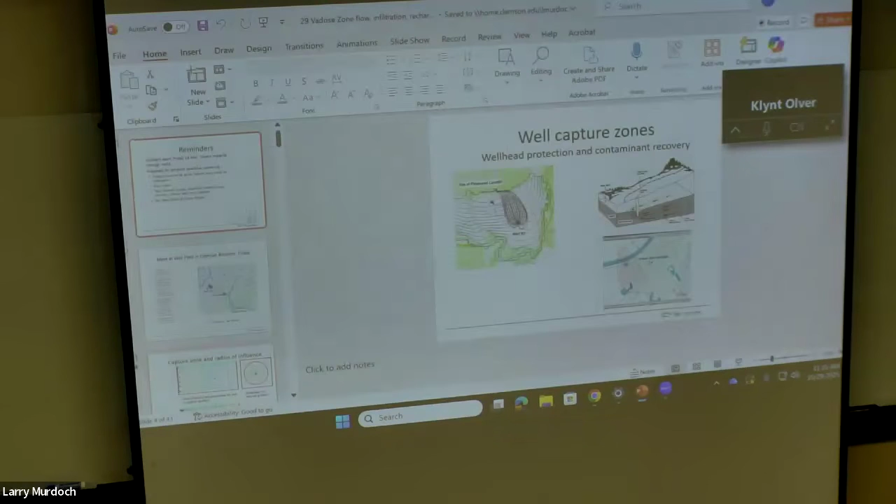Reminder, the midterm is coming up. It still will be a while yet, two weeks from Friday, and it will be up through last class. It won't include this class. We're starting a new topic today, and I won't include that. So it's still a couple of weeks out because we want to do this homework cycle.

There'll be a homework cycle on this work that we're going to do on Friday. There'll be a slug test, and that topic will be on the exam. So I want to go and do that homework and get it back to you before we have the exam, right? It'll be up through last class, so you can see on the syllabus there's a double line on the topic.

There's a project required for grad students, and it's going to be extra credit for undergrads. It'll start soon. The way it's going to be done is there'll be a start-off with a proposal. And that's coming up, I'm not quite sure when the deadline is.

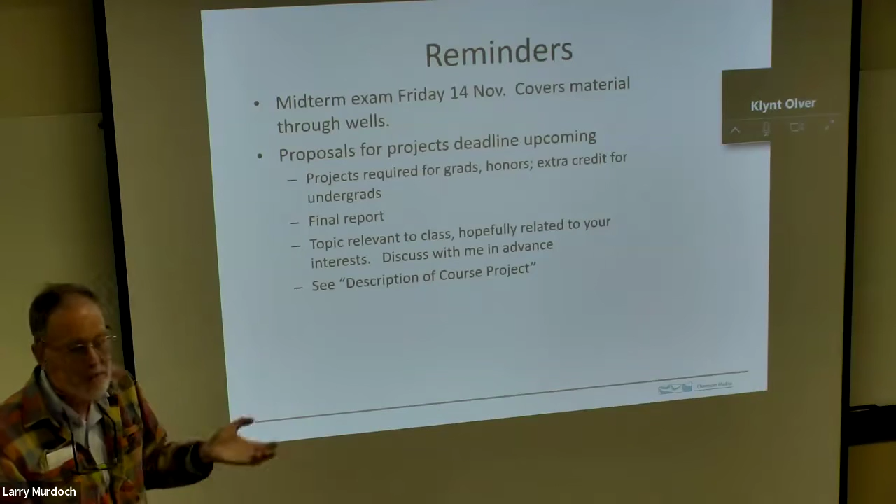It's on Canvas. If we're going to do a project, what I would recommend is that you talk to me about it first. So grad students, you should do that. What I want is to have you do a project that is doable in the time frame, but also relevant. So it should be something related to the things we're doing in class.

So primarily related to groundwater. A lot of times people do things with some of the models that we've been working on. A nice topic is to take the models we've been working on one step further than what we've been doing in class. So there are a variety of things you can do along those lines.

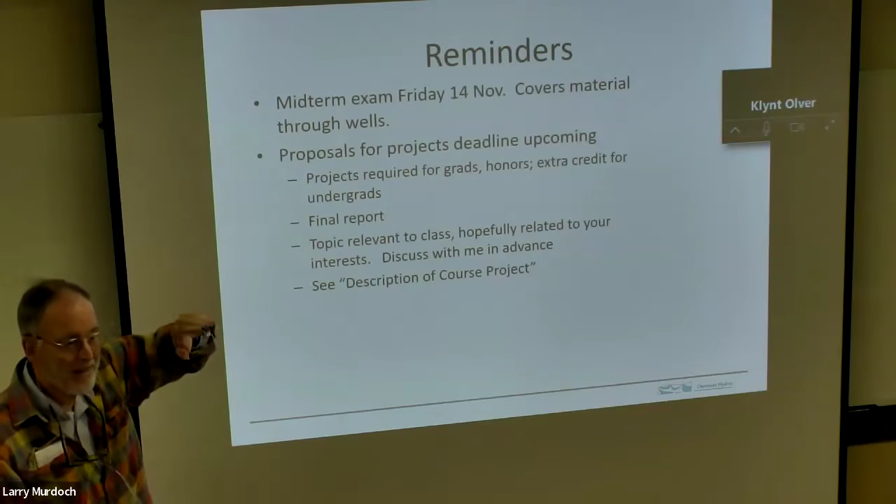It'll be extra credit for undergrad, and I just realized this is coming up, so I've been in touch with the people at Canvas to figure out how to put it into Canvas so it's kind of formally in there, so you can see how many points it's worth. It's a little tricky because everybody's lumped together, and some of you are required to do it, and some of you are optionally going to do it. So how to get Canvas to recognize that, I'm not quite sure, but I'll figure it out.

Okay, so that's coming up. And coming up next time is this field class where we're going to be down here at the well field. We'll meet there. It'll be the regular class time. So keep that in mind when you're planning your schedule.

The way it's going to work is I'll tell you about slug tests and show you how to do one. I'll show you the equipment. We'll have to measure the water level, depth to water. Remember, you've had to use that in calculations, the depth of water. I'll show you how to make that measurement. And then for the assignment, you'll need to come back and do the slug test yourself.

Okay, so it'll give you the opportunity to go and use this gear and make measurements yourself. And the way it's going to work is we'll break up into groups, and I've assigned these groups here just to make it simple. So what we want to do is identify a time when each one of these groups can come and do the test. It'll probably take an hour or so.

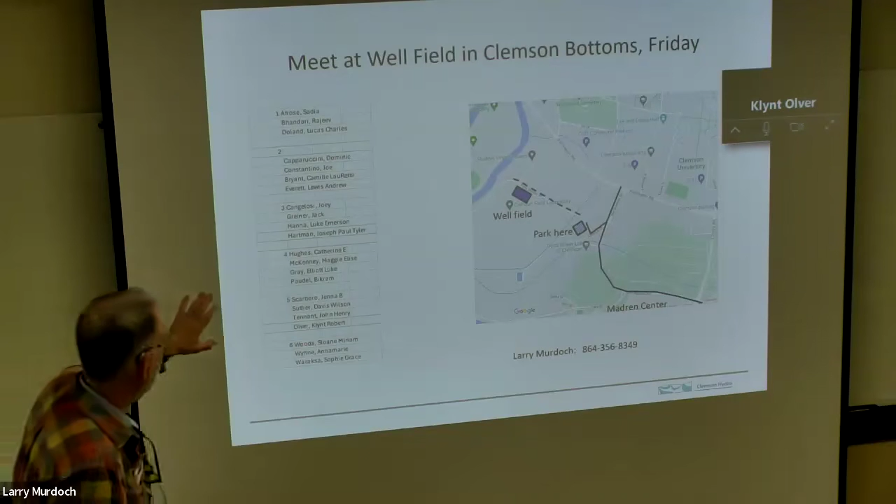One thing that would be good, maybe after class, go and say hello to the group members. Some of you may know other people in the group, but it would be good to introduce yourself. Try to figure out a time when you can all be there to do it. Maybe when we meet in the field, we can do some scheduling to make sure there's no overlap. So try to find maybe two times when the whole group can make it, and then we'll get a unique time for each group to come.

This has gotten pushed back a little bit, so the homework for this is due a week from Friday. Normally we would have done this on Monday, and you would have had this week and next week to do the field work and then work it up. Now we're going to be short some time, so I'd like to keep it still due Friday so I can grade it and get it back. If things get pushed with your schedule, then I'll push the due date back a little bit. But because I want to get the homework back before the exam, I'd rather not push the exam back. So we'll play that by ear, but right now we'll be targeting getting the homework done by a week from Friday. Any questions on that?

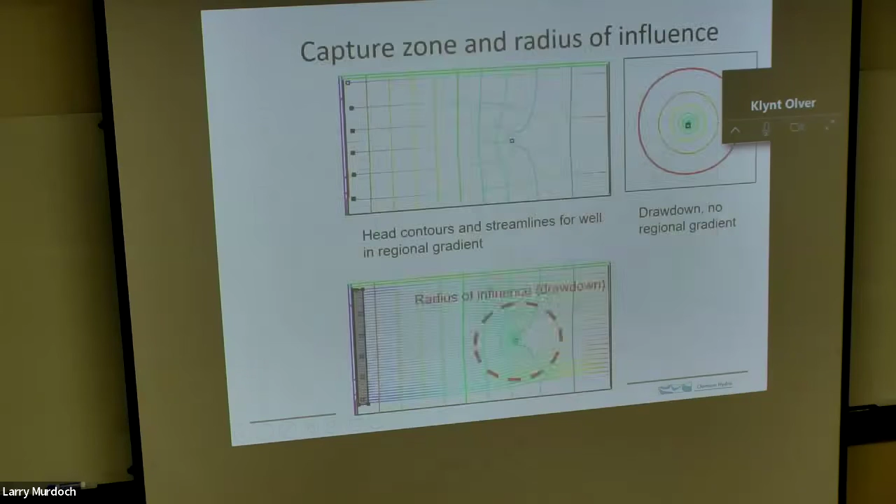So we're going to change gears a little bit. What we've done so far in the class is we started out with some big picture stuff. We learned about flow through porous media under saturated conditions, learned about the water table and contouring the water table and flow nets and how to analyze flow in saturated conditions. And then we spent a bit of time working with wells and how to characterize aquifers.

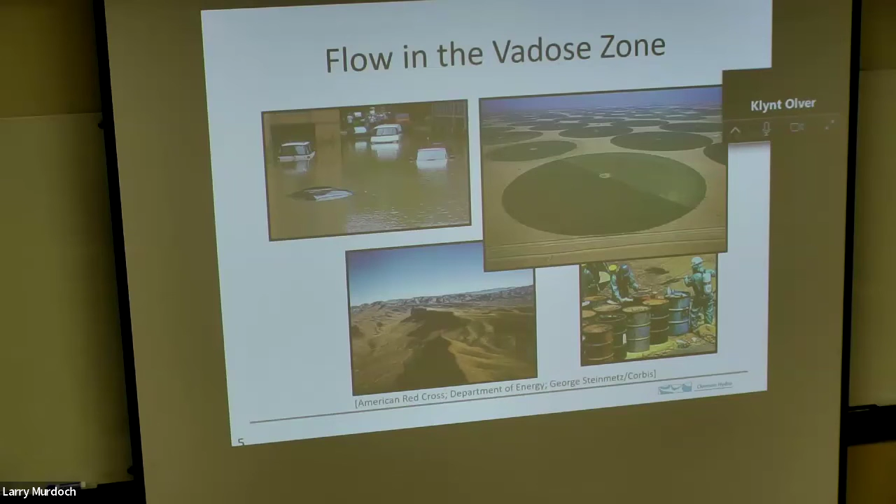So what I want to do now is go from the aquifer up above the aquifer and look at what's happening in the vadose zone. We're still in the subsurface, but we're going to be above the aquifer, looking at how to think about flow and storage of water in the vadose zone. There are a bunch of reasons why we might be interested in this.

When we have rainfall - oh, and by the way, the weather looks like it's going to be good on Friday. It'll be sunny, partially sunny tomorrow and then sunny on Friday, with a high in the 60s, but it might be cooler in the morning. So check the weather, maybe bring a jacket. Also it's in this grassy place, and the grass is a little bit high in places, so it may still be wet. I'm going to bring some waterproof shoes - may not need them, it may be dried out, but just a heads up about that.

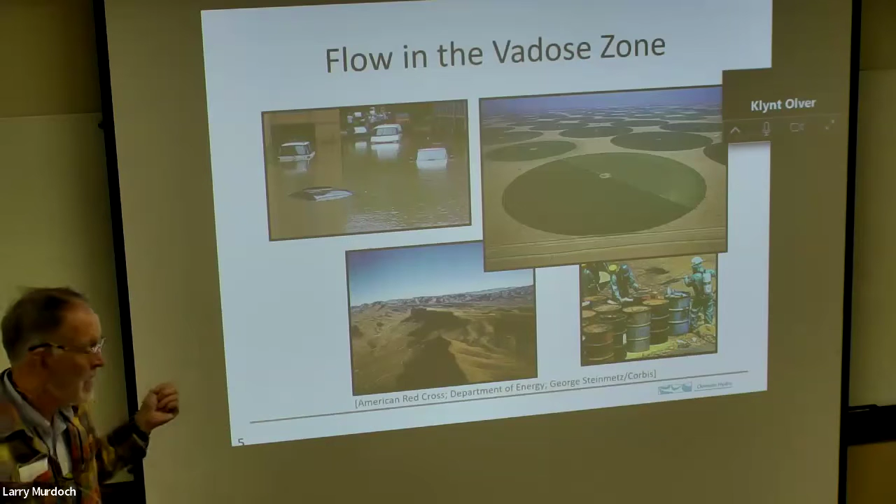So yesterday we had a pretty good amount of rain, right? And so what happens when it rains?

What happens when it rains is the rain falls, and some of the water that falls as rain infiltrates into the subsurface, and some of it flows downhill. The partitioning of the rainfall between infiltration and either overland flow or interflow plays an important role in flooding, because the rapid rise of water comes from this component of the hydrologic cycle. If rain is partitioned into infiltration, it goes into the subsurface and makes its way to the stream slowly, giving you base flow and modest changes in water level. But this other component is much more rapid, and that leads to flooding.

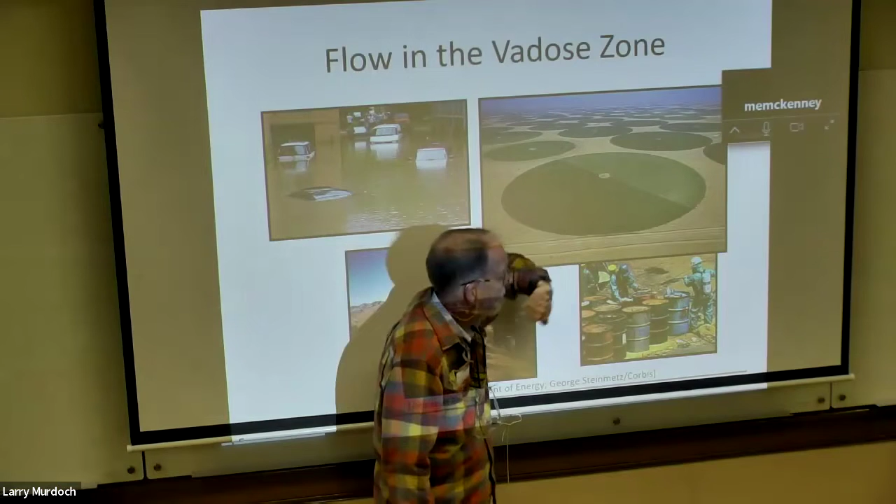So if we're interested in surface water, we'll also be interested in the role that flow in the vadose zone plays in creating floods. Most agriculture is grown in the vadose zone, so the flow of water there is going to be really key to having successful crops.

You want the water to be stored long enough for the crops to utilize it over some time period. You don't want the water to go through the soil very rapidly with very little storage, because then the crops don't have a reservoir to draw on. You also don't want it too permeable—if you had very clean sand, crops don't grow well on that because the water goes through it very quickly.

On the other hand, if permeability is really low, the water stays there and remains saturated for a long time, and you don't get oxygen into the roots. So those two end members are poor for growing crops. You want a grain size distribution in the middle—a loam is the ideal case, a broader distribution of particle sizes that holds water but also allows air to get in and oxygenate the roots. So the details of flow in the vadose zone are really key to agriculture.

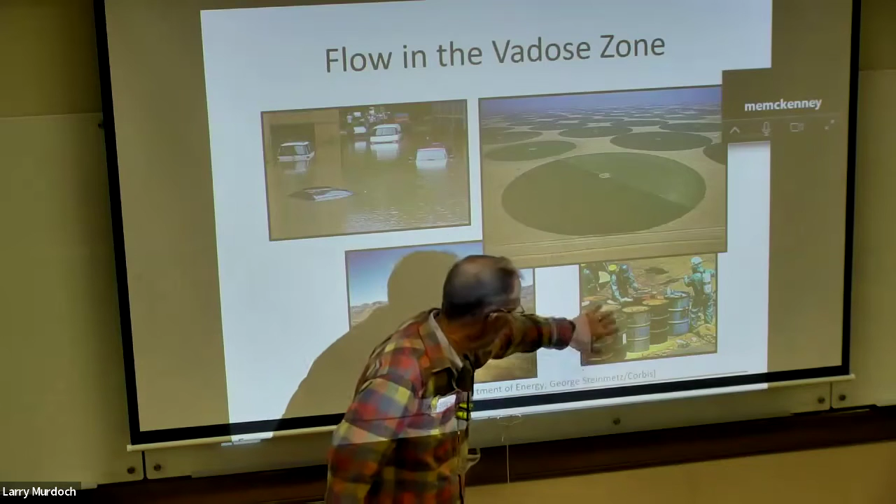This is kind of a classic place where they were storing these old drums full of nasty stuff.

So then there's this place. Anybody recognize that place? No?

Anybody heard of Yucca Mountain? It used to be a lot better known than it is now, because for a long time Yucca Mountain was the high-level nuclear waste repository that we as a country were going to use for our nuclear waste. They spent a lot of effort understanding the site, and then the political winds changed, and they decided they would not put it there and would do something else. It's not clear just what that else will be—I think they're still working on that. There's been some discussion lately that maybe they would consider going back to that site.

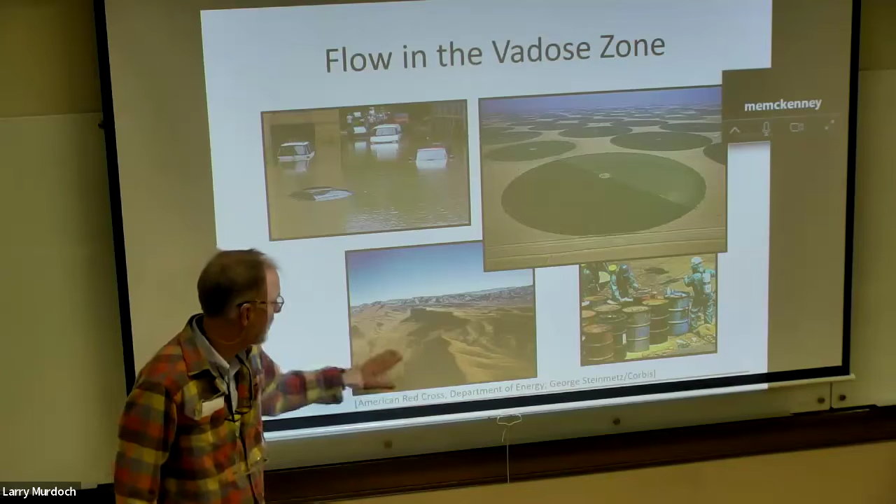What this is, there's this ridge, and you can tell it looks pretty dry. I don't see anything growing. This is in Nevada, in a very arid place. And this is a ridge, and the water table is very deep, several hundreds of feet below ground.

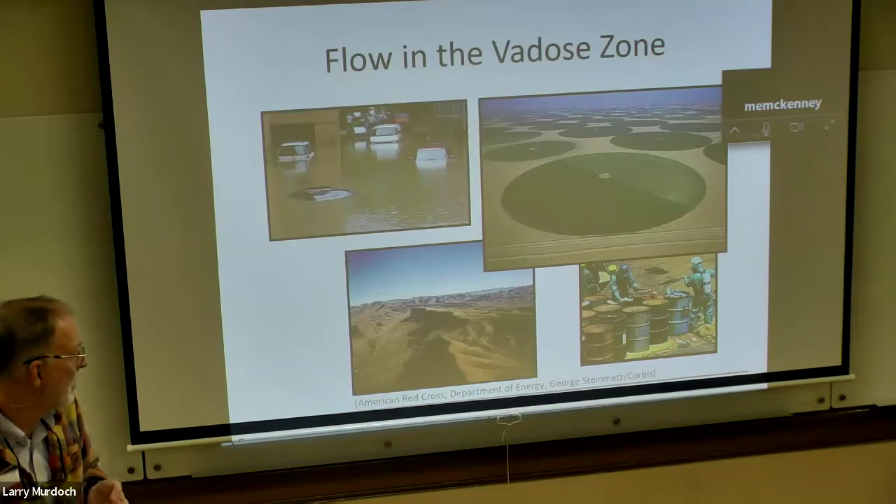The idea was that they would take the high level nuclear waste and put it down below this ridge, about halfway down from the ground surface to the water table. So it would be deep, but still way above the water table. It's very arid, so they'd expect very little water to encounter the nuclear waste, and even if there was some kind of release, it would still be a long way to go to reach the water table. So the properties of flow through the vadose zone were factored highly into the selection of this site as a good candidate for storing nuclear waste.

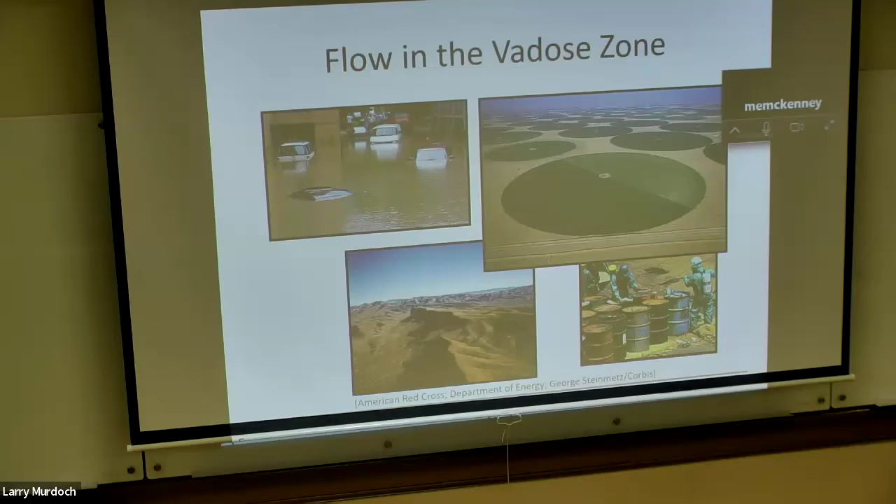Okay, so here's what I want to do: talk about the conceptual model of infiltration and flow in the vadose zone. How do we characterize the vadose flow properties, and then how are we going to go about simulating it?

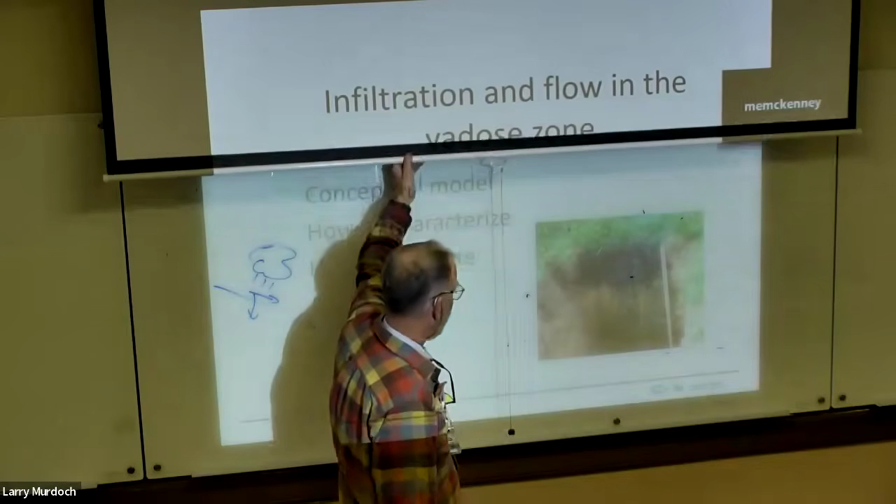What I've got here is a pit that was dug at the site of an experiment where a ring was pounded into the soil, right here. Let's draw it out. So there was a ring driven in like that, sticking up like this, and here's the soil. Then they put in some water, and the water has some blue dye in it.

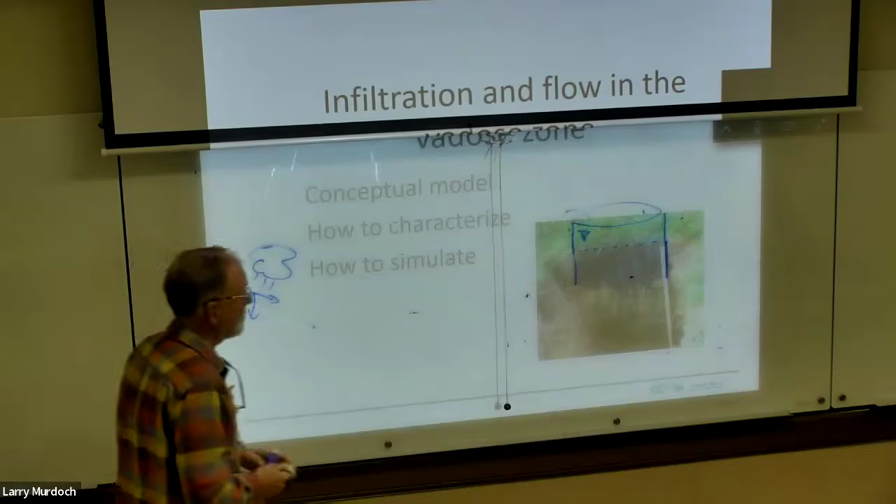So we look at it in cross section over here. Here's the ground surface, and here's this ring. Some water was put in here, ponded up at the ground surface, and it's infiltrating. The water level is usually kept the same, and the water infiltrates. After a certain time, the water is infiltrating down to that point, and it's saturated there, then saturated in the subsurface, and you have this zone that ends up dyed.

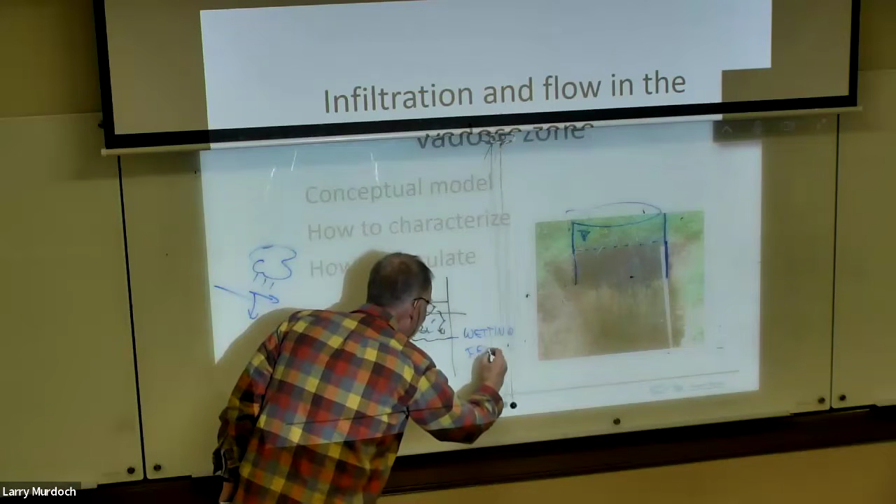This leading edge is called the wetting front. You can see here at the end of the experiment, the wetting front is right around here. There's the wetting front, and it's gone down about a foot, I guess.

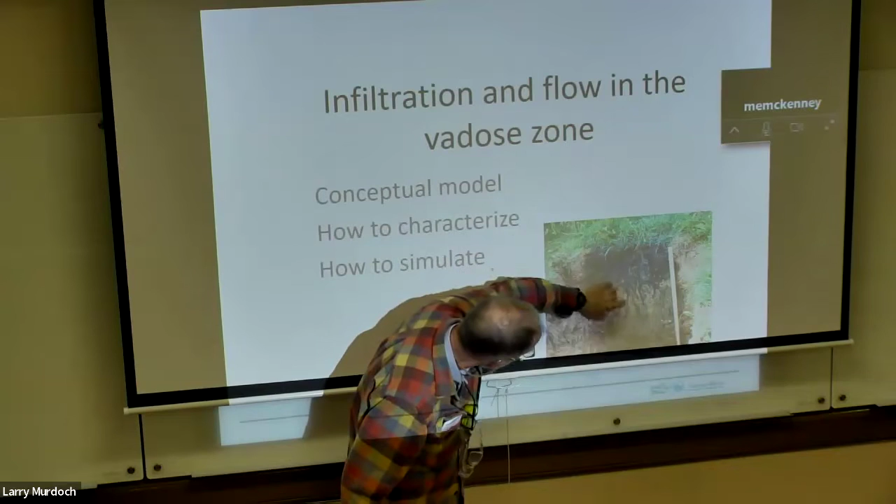That's the main thing that's happening. What you can also see is that these are dyed columns that go down. This one goes pretty solid down to about here, and then maybe there's some blue dye there. So these are preferential flow paths that the water is following, probably cracks, or channels formed by roots that have penetrated deeper. You can see some of the water is flowing more rapidly than just the wetting front.

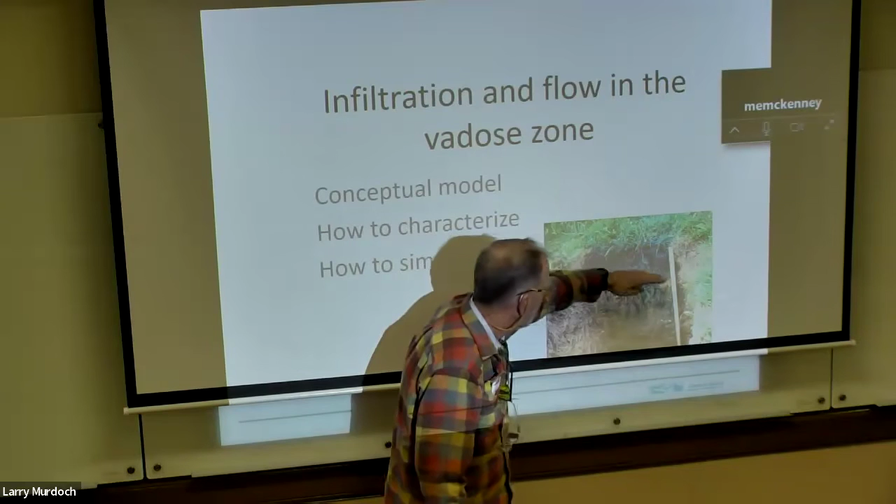Some of it is moving maybe twice as deep as this, but it's a much lower mass going through these preferential paths. So if you're concerned about where the zone of saturation is and the main mass of water infiltrated, that's going to be defined by this wetting front. But we also have preferential paths where some water is moving much more quickly. So if you're concerned with contaminant migration and how rapidly contaminants might reach the water table, there are really two rates of advance: the rate at which the wetting front is moving, with a large mass, but if you're concerned about when some contaminants arrive, the preferential flow paths are conduits where contaminants could move much more quickly than in the wetting front.

Okay. Yeah, does this help with your conceptual model? You can't get any actual data from this kind of experiment, or can you? All I see is preferential flow paths, like you said, but I don't know how you would measure, or pull actual data from that.

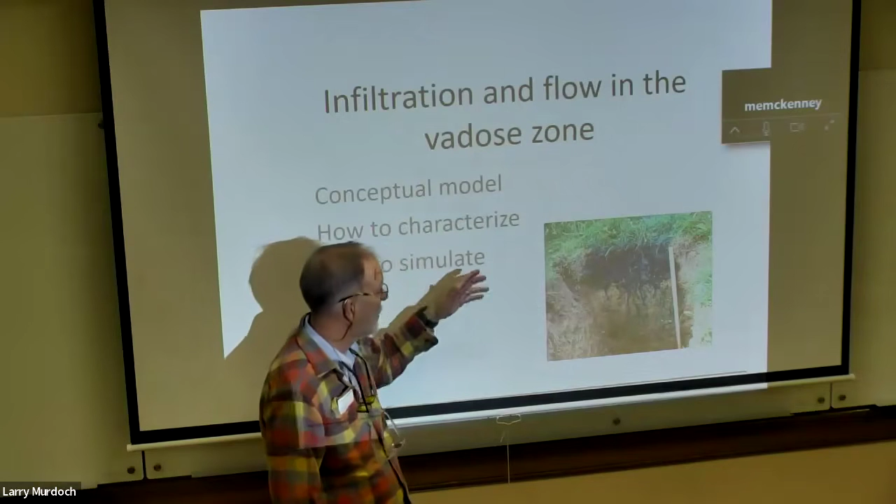Yeah, so one of the things that's done with experiments like this is to get just the bulk infiltration rate, and see how that changes with time. You're not really concerned about this per se. But if you're interested in contaminant transport, then you'd be interested in this, and you'd want to see what the spacing is and how far the dye is making it out in front of the wetting front, things like that. But it would be difficult things to measure without excavating it.

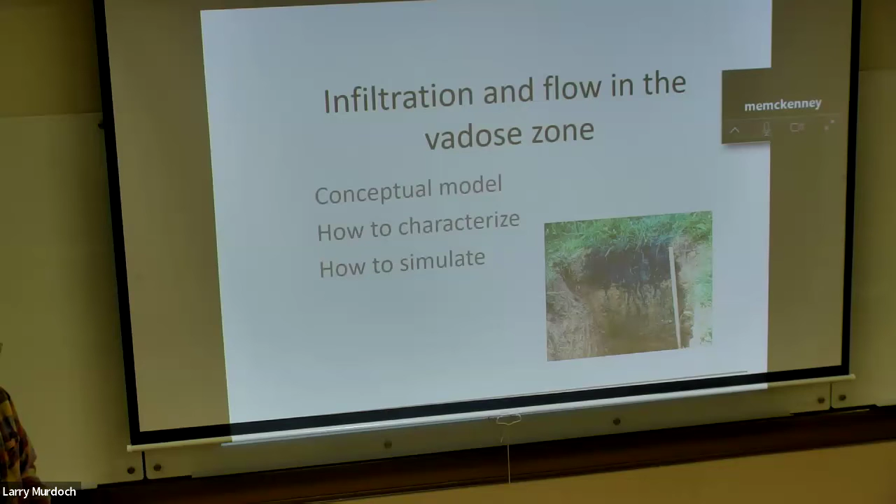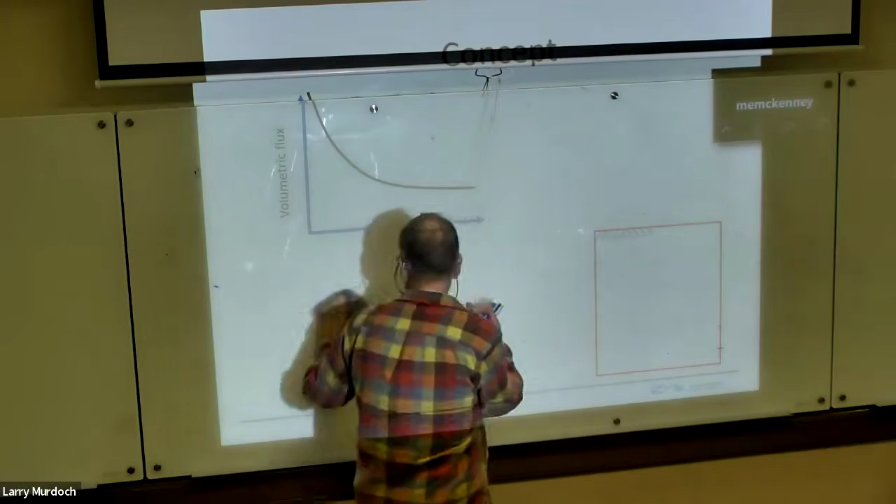Okay, so we'll take a look at some conceptual models here. The plot here is volumetric flux as a function of time. I want to introduce the concept of infiltration capacity. This will be the flux in. Here's a cross section: there's the ground surface, and this curve here is what we'll call the infiltration capacity.

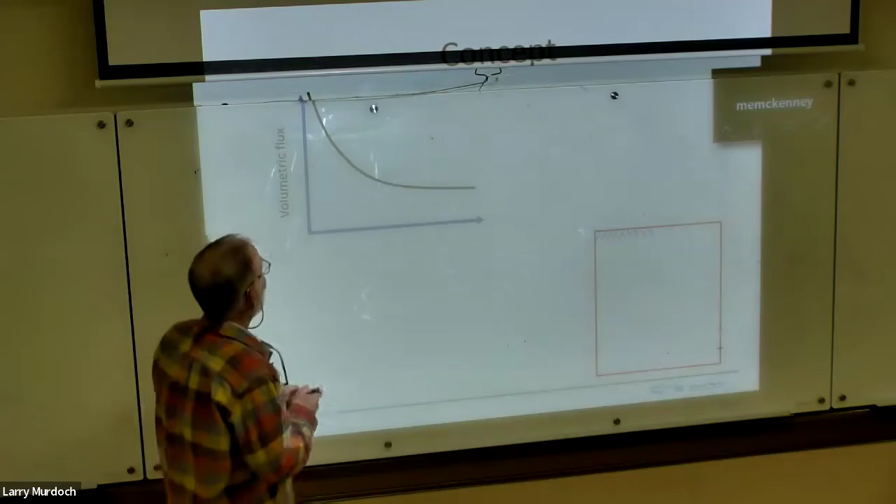Infiltration capacity is the maximum rate that the water could infiltrate. We start out with the soil in a dry state, since it's been a long time since it rained, so the capacity to infiltrate is pretty high when we start.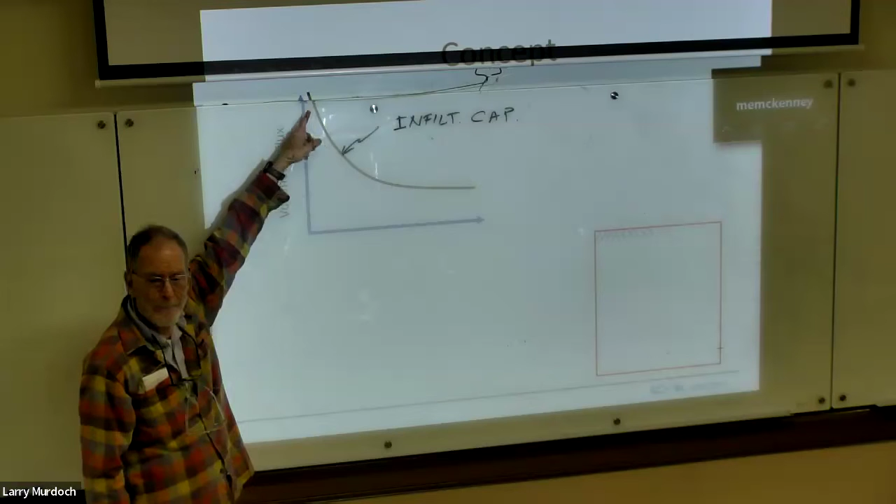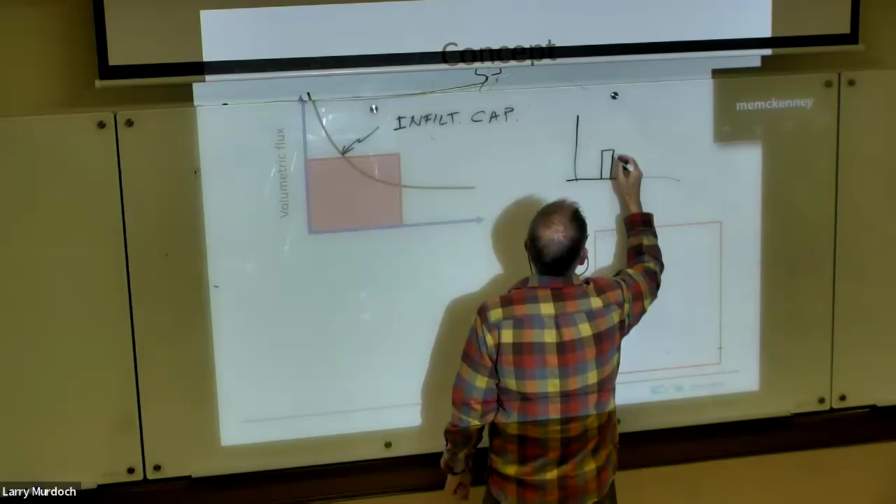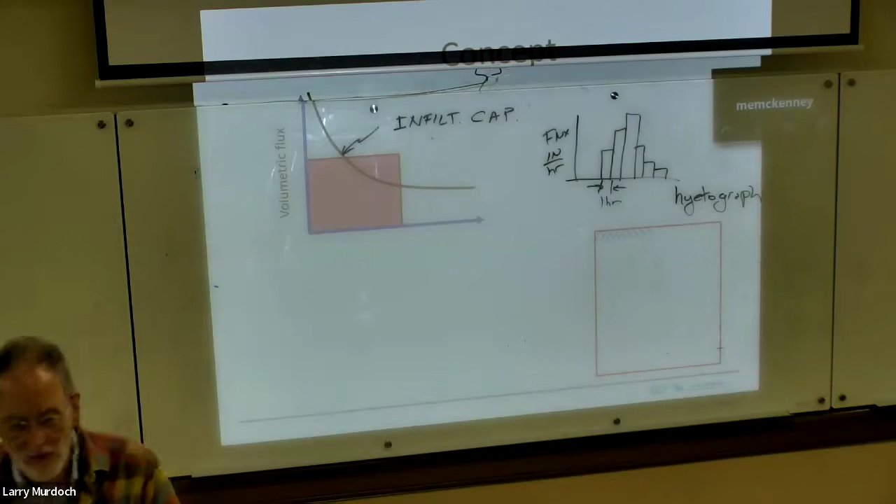Now, since it's just a conceptual model, we'll keep things simple and plot the rainfall. Rainfall is often represented using a histogram approach, like the rainfall we had yesterday. This is called a hyetograph, and it's a flux averaged over, say, one hour, so it would be inches per hour as a flux. The rainfall rate is changing with time, so to characterize the flux you average it over a certain time period, starting out slow and then building up, changing with time.

So this is what a real rainfall would look like. What I'm going to do is take a simplified approach and average it. We could take just one of these blocks, or average it over the whole time period, so instead of varying with time, it's just one block, one average rate over the whole time. So this is a rainfall rate at this rate over this whole time -- very simplified rainfall.

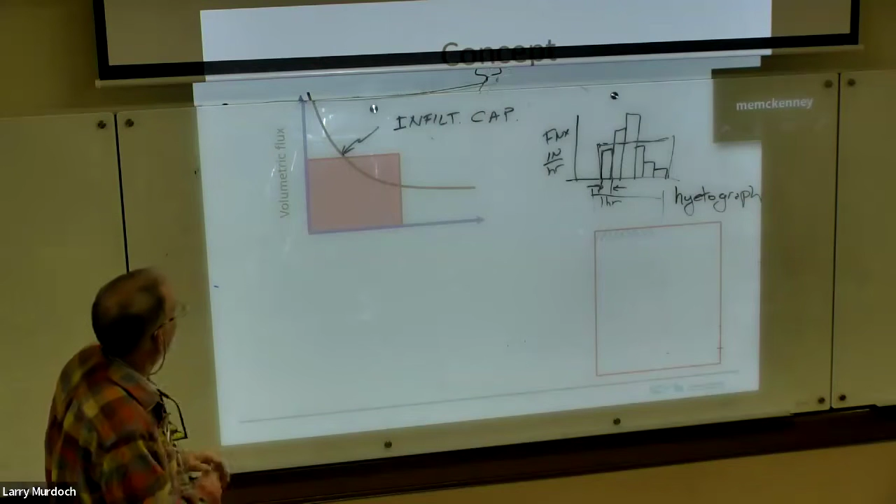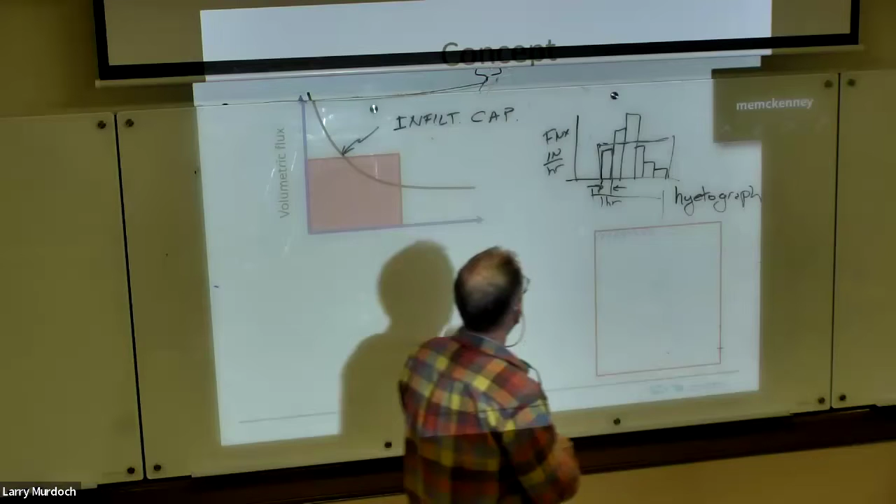So what happens when the rain starts out is the infiltration capacity is greater than the rainfall rate. So as the rain falls on the surface, it's all going to infiltrate right here in that time period.

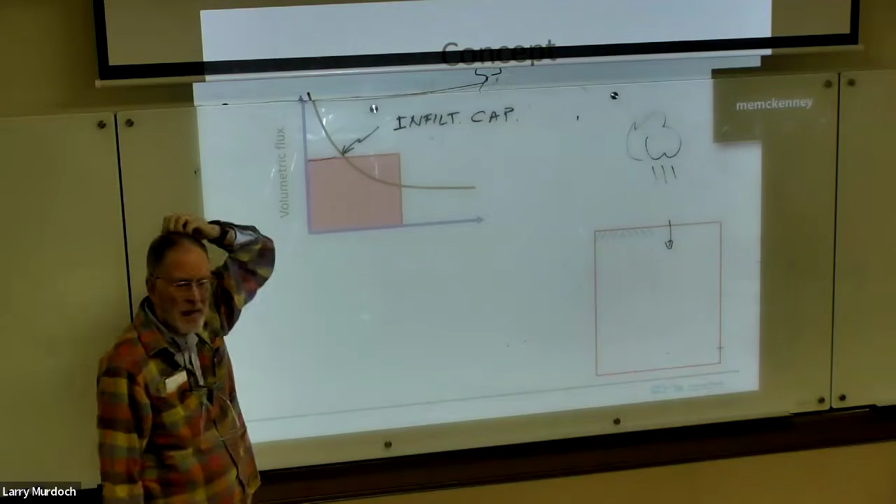So if you're out in a field and it starts raining, you look down and you're not really seeing any water because everything that falls is infiltrating. But as that happens, the water content of the soil is increasing, and as it increases, the capacity for infiltration is going to decrease. So this change in infiltration capacity is occurring because the soil is getting wetter as it rains.

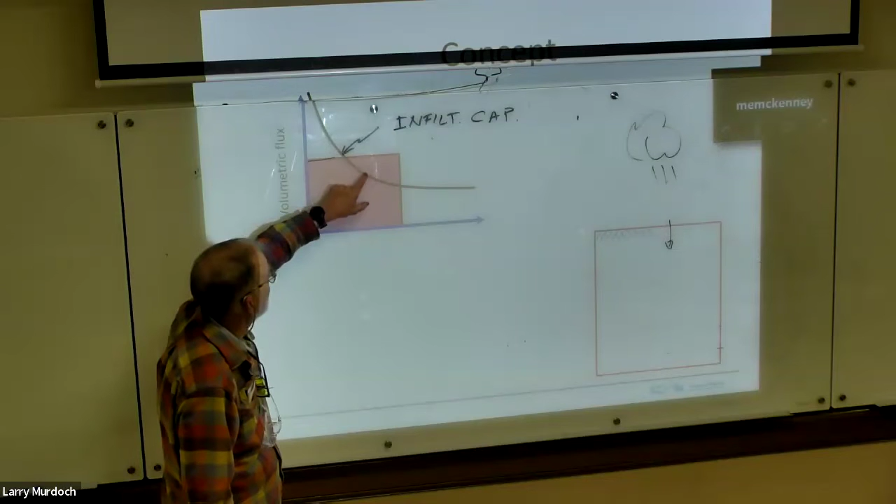And then at some point, the infiltration capacity becomes equal to the rainfall rate. When it surpasses that, the capacity for infiltration becomes less than the rainfall rate. So if we think of it as a control volume, if the flow into the control volume is greater than the flow out, which is the infiltration capacity, then we have to have some water stored in here.

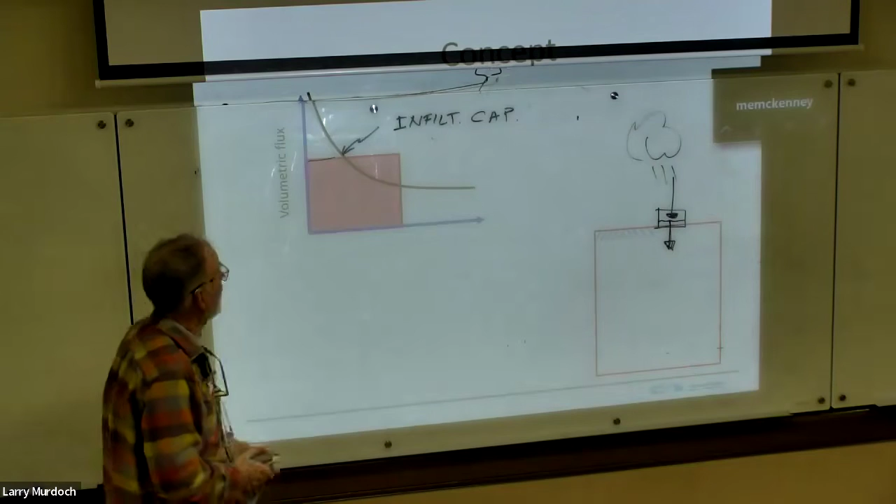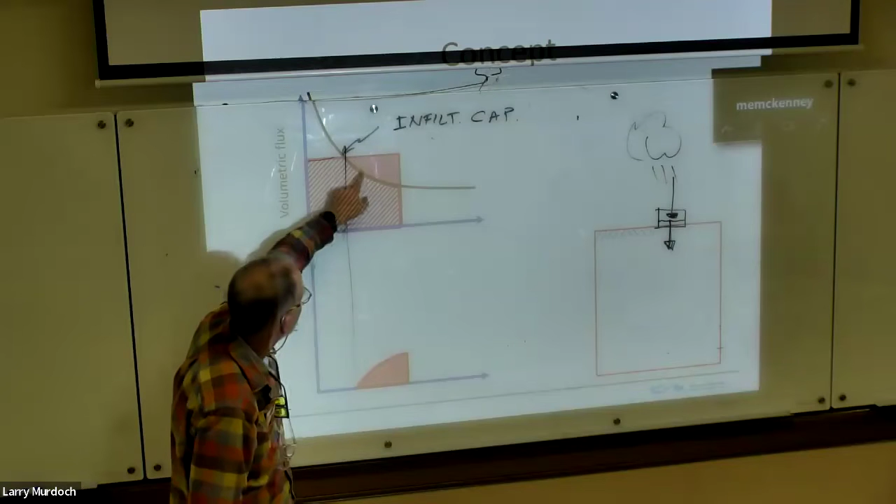So what happens when we've reached this point is we start to get water ponding at the surface, and potentially overland flow. This is the rapid flow that would go downslope and accumulate in streams. The hatched part is what's going into the subsurface, and this little piece is going as overland flow.

So then we continue on. Here's the graphic: there's the rain, and we've got some infiltration coming in, shown in the graphic on the right. There's the wetting front moving down, and as this is happening, this is the depth that the water has reached, and the water content here is increasing.

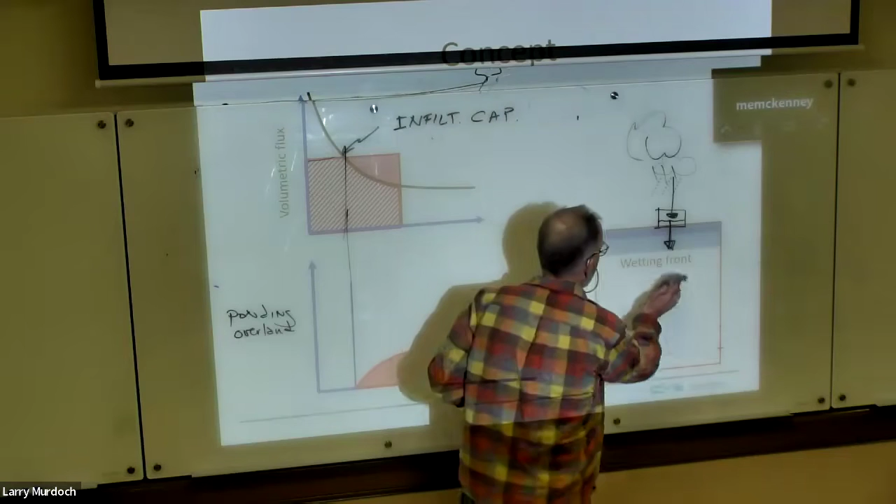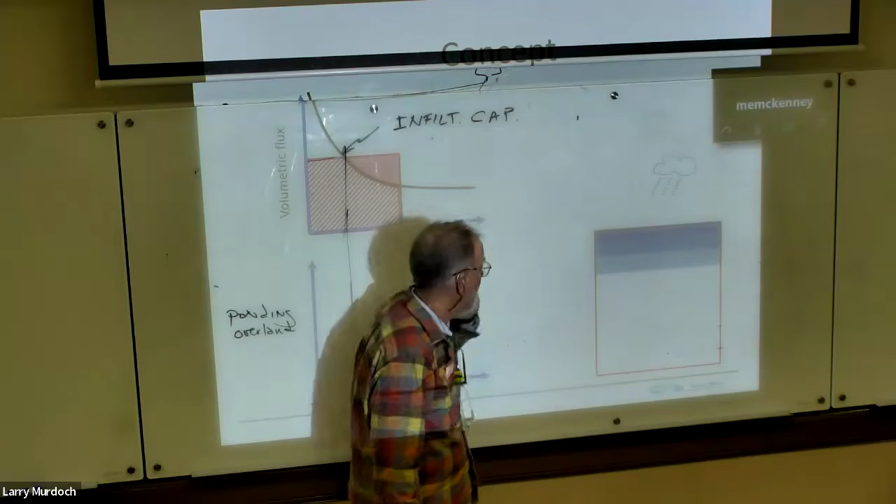And it keeps going, keeps increasing. And then when it gets high enough so that the water content here at the ground surface is saturated, the soil here is saturated, then we start to have ponding here. So the rainfall rate is greater than the rate at which the soil can infiltrate, and you get ponding building up there. And if you're out walking around and the ground is flat, you start to see puddles forming, right? That's a common thing to see.

I didn't really think about it at first, but in order to have the ponding, or puddles, you have to have a rainfall rate that is greater than the infiltration rate. Now, it's going to form ponds if the ground is flat, or you've got some closed basins that form a puddle. But if it's a slope, then you have overland flow.

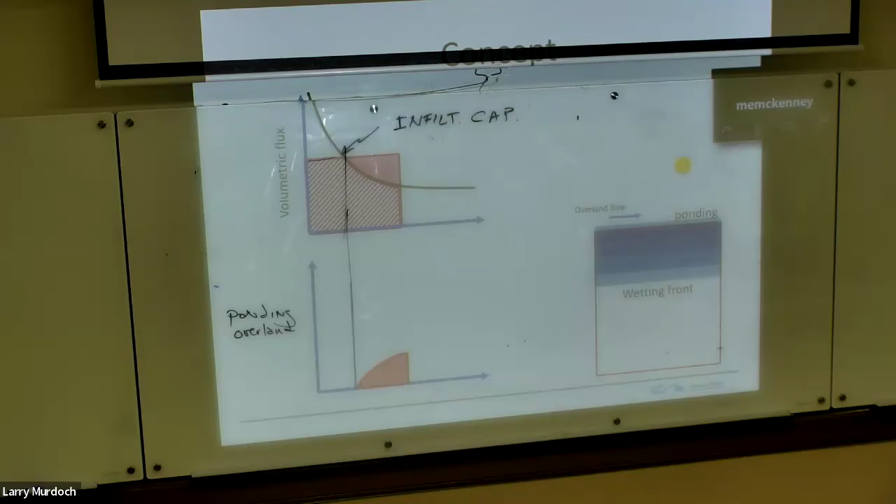So then the rain stops, and in our simple model here, the rain is stopping, and overland flow is stopping abruptly. It's a simple model. But then what's happening over here is this is stopping, but this process is continuing.

So what will happen after the rainfall is the wetting front will continue to advance, and it's going to do that by moving down. At this moment, there's no water here, no infiltrating water here. This is partially saturated. When the wetting front moves down to here, then there's only this much water in there.

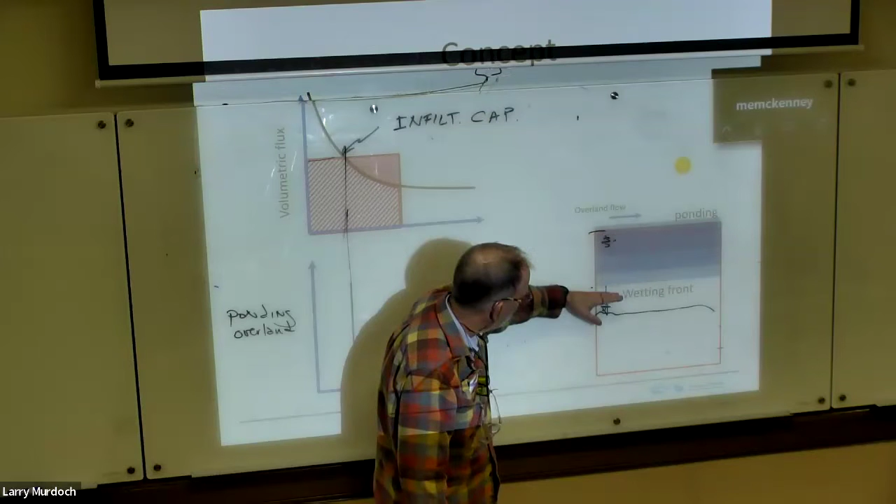So if the wetting front moves down here, then that means that some of the water that's here has to drain out of the pores. As the wetting front advances, the pores drain here, and the advance of the wetting front by gravity is slowing.

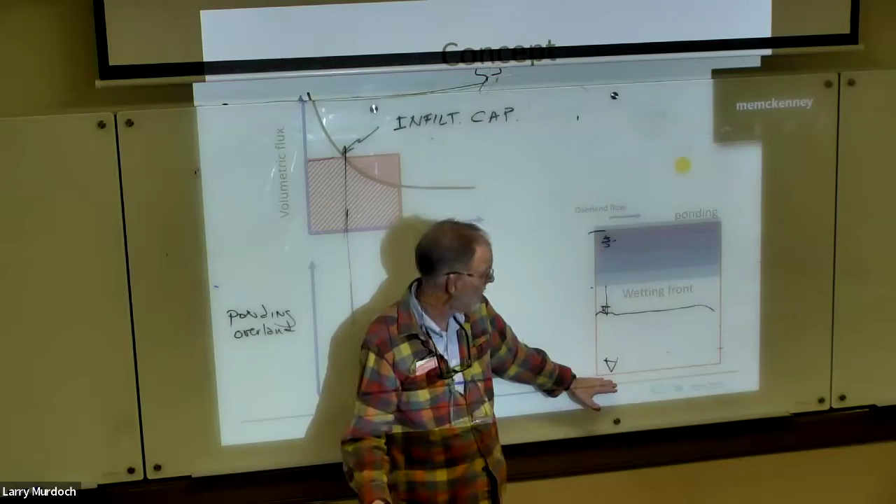And eventually it may stop or it may reach the water table, down here. If it makes it down to the water table, then that's recharge of the aquifer. If it doesn't make it down, then we don't have any recharge.

What's going to happen also is as it's moving down, it's slowing down. And then we also have trees here with roots, and the trees are starting to bring it back out. That will also slow it down and limit the depth that it can reach.

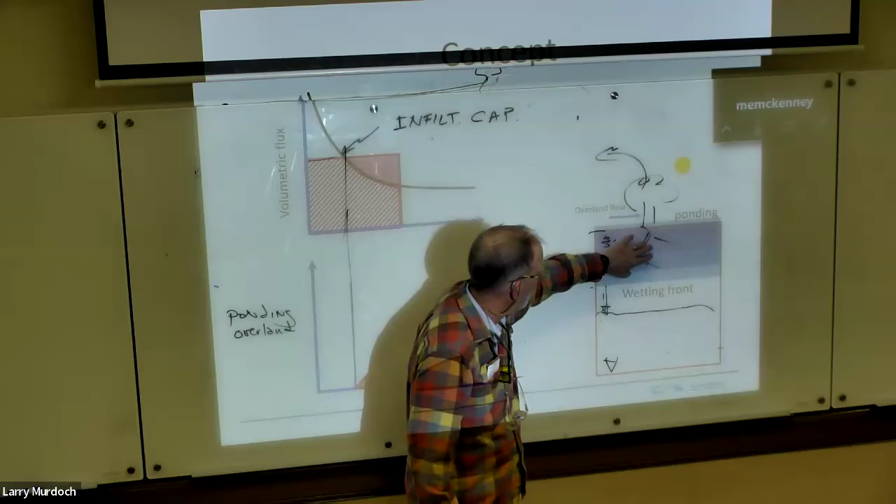So what we find actually around here is we've got rainfall that happens. On average, the monthly rainfall is about uniformly distributed through the year. In the summertime, when we have this going on, the trees are active and they pull out the water at a fast enough rate, so the wetting front rarely makes it down to the water table. So the recharge that happens around here is typically in the wintertime when the trees are less active.

So when we have big rains, and the trees are still fairly active now, that big rain that we had yesterday that lasted all day, that's the kind of thing that would make it down deeper to recharge the bottom.

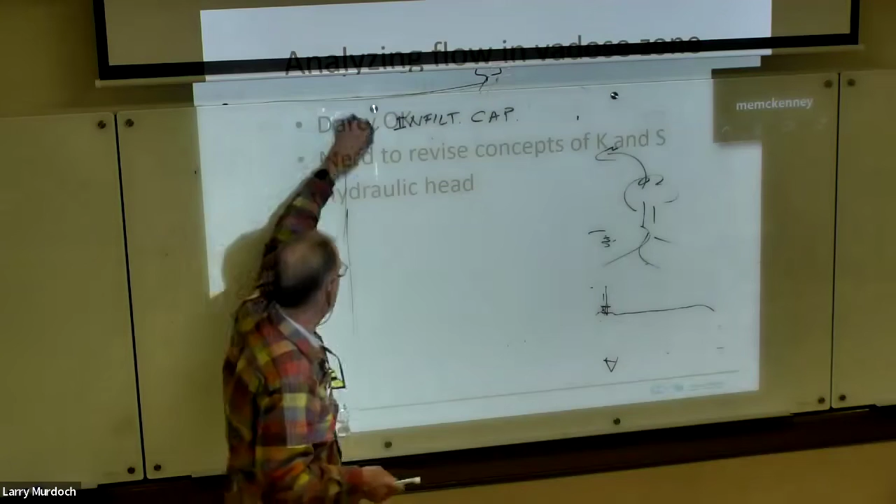So there's some ET happening, recharge may happen. The stuff that's going on in the vadose zone is closely related to, or has some important interaction with, the saturated zone and the extent to which recharge occurs.

All right, so there's some concepts. What we want to do is advance these concepts that we can then use for doing some modeling. So if we want to analyze flow in the vadose zone,

Darcy's law, we spent a good bit of time so far thinking about Darcy's law, utilizing it for various applications. And fortunately, it's going to be okay. Darcy's law will hold, and we can use those same concepts where the hydraulic head gradient is going to be proportional to the volumetric flux.

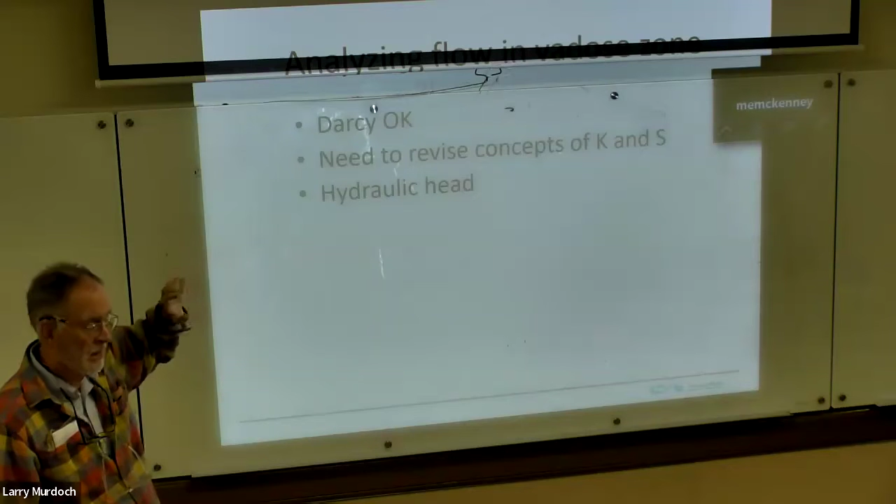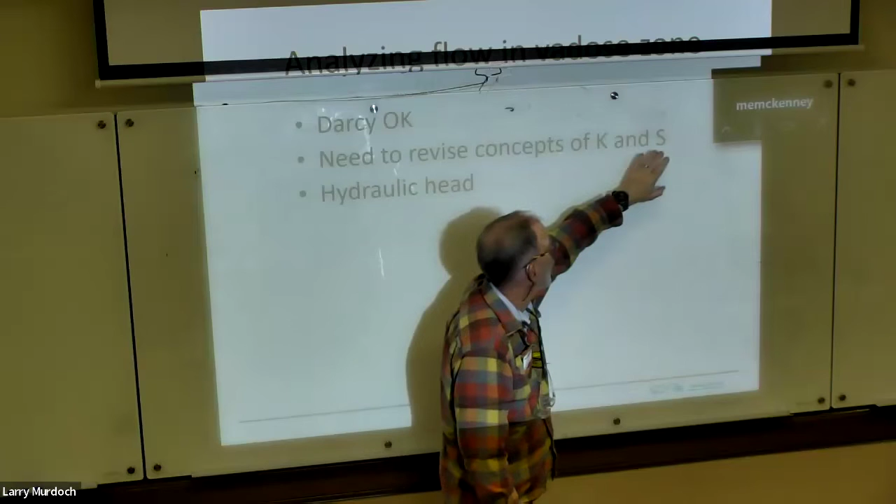Okay, so that's good. We're going to need to revise concepts of hydraulic conductivity and storativity, though. Those concepts will still hold, but we're going to find that both of those things are going to change with the water content of the soil. So as the water content decreases, the soil dries out, that's going to decrease. And this will actually increase, and be larger in the vadose zone because we can fill and drain pores.

And we'll also want to take a look at the concept of hydraulic head. It'll essentially be the same, but there'll be some different twists to it. Okay, so what I want to do to start out with hydraulic head is go back to this little schematic that we used when we first were looking at hydraulic head. So this is just a column of water, and it's sealed open here at the top, and the water just, at this level, it's just sealed here, so there's no flow in this.

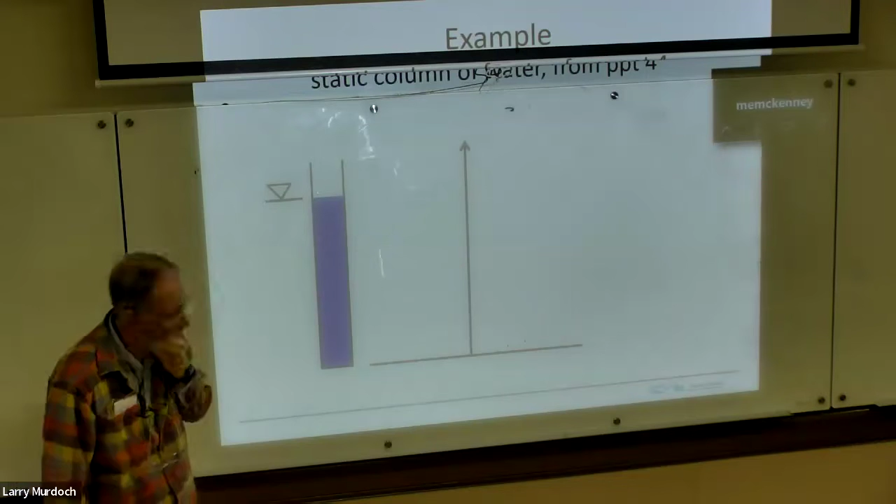The water is just a static column. Remember, hydraulic head for groundwater stuff just has two components: the pressure head and elevation head. The velocity head we can ignore.

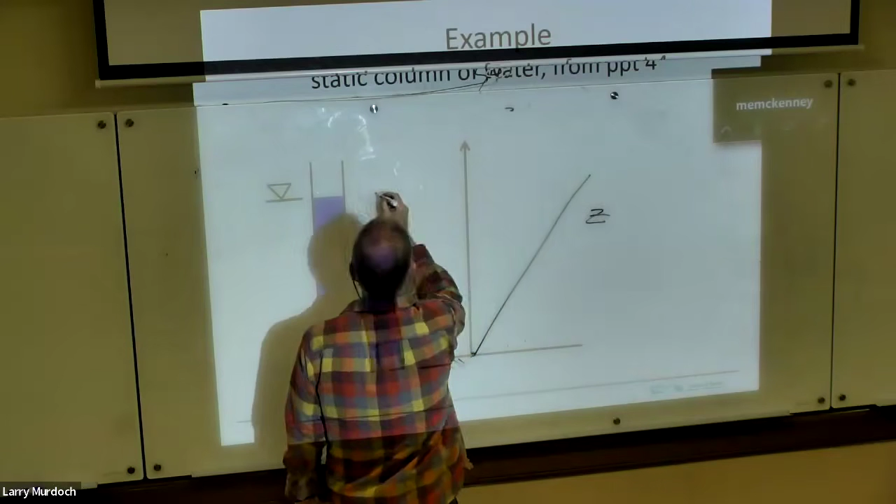So what we did was draw this out. Here's the elevation head, starting at 0 at our datum, and elevation head just increases like this. Here, the water surface would be like the water table, so the pressure head is 0 here, and the pressure then increases with depth, like that. So there's the pressure head. We add those two together, so that's H equals P over gamma plus Z. Okay, that's the way we did it for the saturated zone.

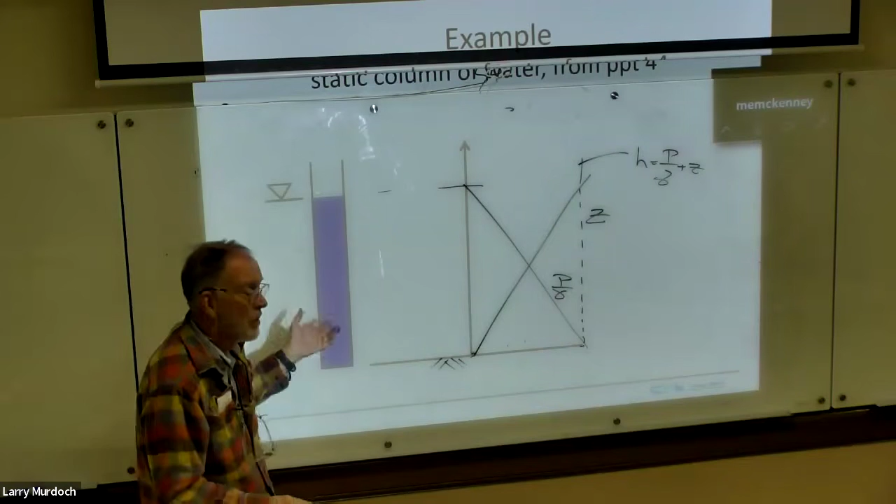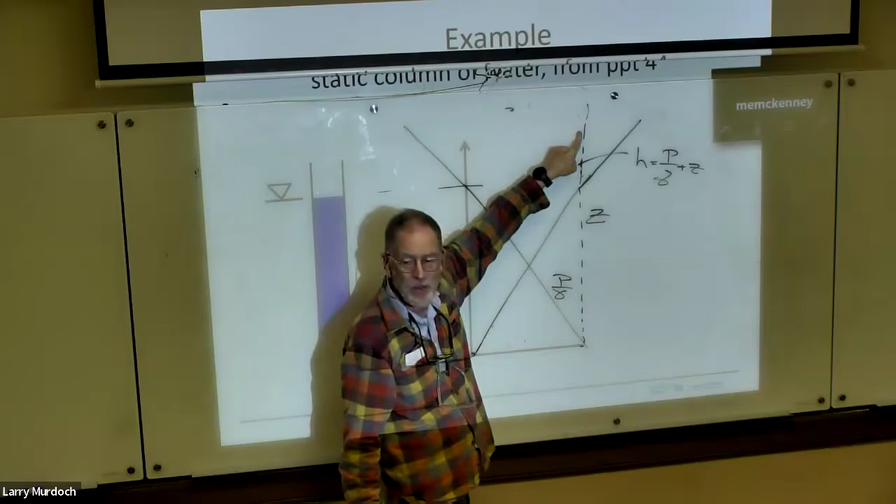Now for the vadose zone up here, we're just going to extend these lines, going up like that and up like that. The elevation head is just the elevation above the datum, so it goes up like that. And if there's no flow here, then the pressure head has to go like that — I'm sorry, the total head has to be the same everywhere if there's no flow. So if the elevation head is doing that, then the pressure head has to do that, and so what we get from this is that this is 0.

So the pressure head here in the vadose zone is less than 0. Here we're using 0, the atmospheric pressure, as our reference. So what this means is that the pressure head in the vadose zone is less than atmospheric pressure.

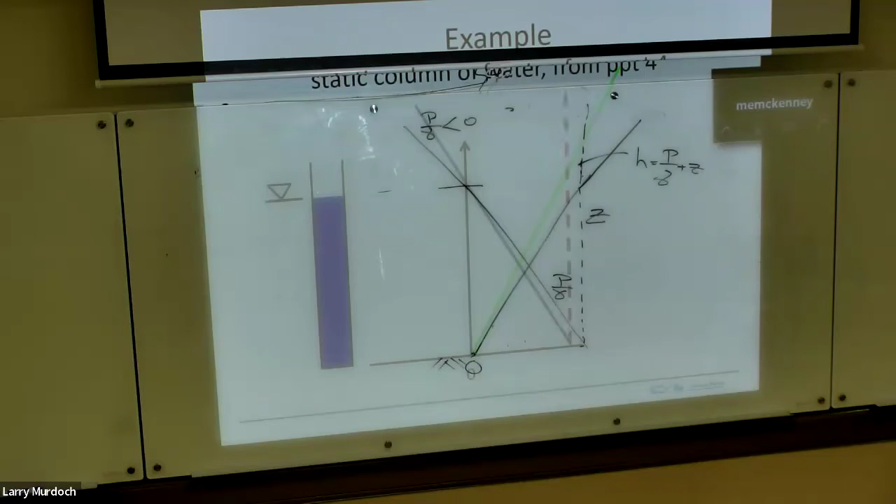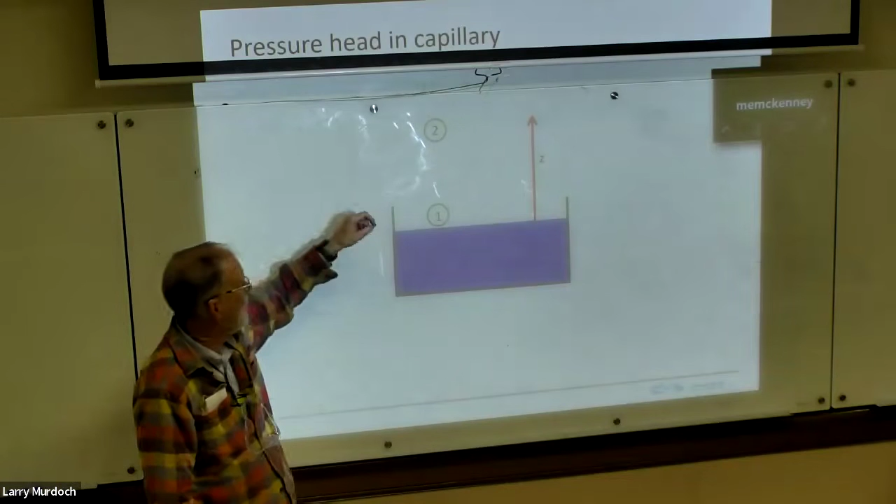All right, so that's one set of concepts. Let's also do another experiment. So we have a little cup of water here, and I'm going to take a capillary and dip it into this cup here. We can think of this maybe as a small diameter glass tube.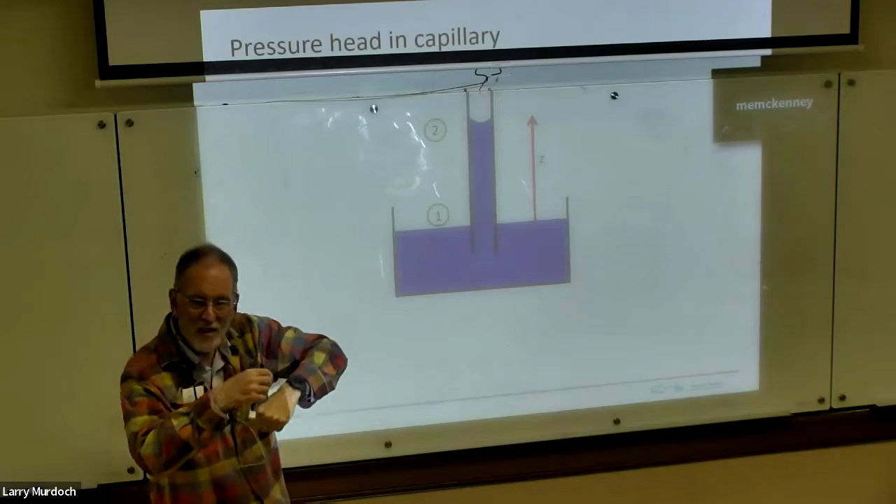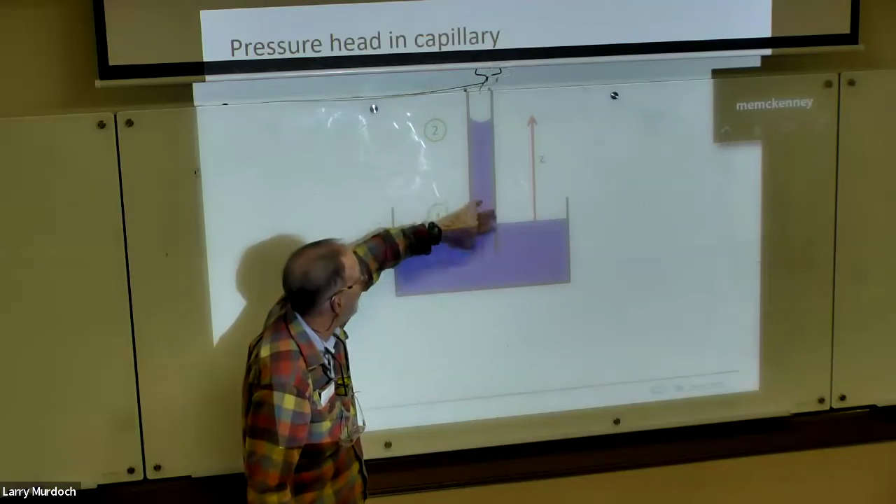So there's a small glass tube, and it wicks it up. Sometimes when they do blood tests, they have a little glass tube and it wicks the blood up there. You could also think about this as a paper towel. A paper towel will have some very small pores in it that will pull the water up. So if you take a paper towel and just dip it into the water, it's going to pull the water up, and it works with capillary action. So you can think of that as just like a single pore in the paper towel.

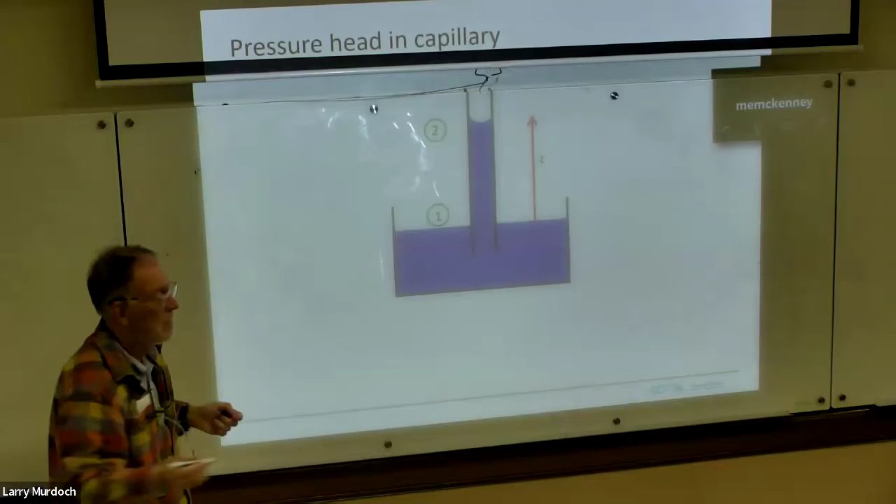Okay, so we've got the water that comes up here, and it's now stopped. The flow is stopped, so everything's static. So the hydraulic head is going to be the same here and here. I've got these two points: this is right at the water surface, and this is right here at this other surface. So what we can say, because there's no flow, is that H1 is equal to H2 — the hydraulic head at these two points is equal. There's no flow.

By the definition of hydraulic head, it's the pressure head plus the elevation head. I'm going to have these two points, with subscripts for the pressure — this is the unit weight of water, so it's the same — the pressure head at that point, and this is the elevation head. And H2 is going to be the thing here.

We picked this point here as a special point, right at the surface. Since we can pick our datum to be anywhere, I'm going to say that's my datum. So if that's the datum, then Z1 is equal to 0. And if it's right at the surface, the pressure there is equal to 0, so P1 over gamma is equal to 0, so H1 is equal to 0. That means H2 is equal to 0. So H2 equals 0 equals P2 over gamma plus Z2.

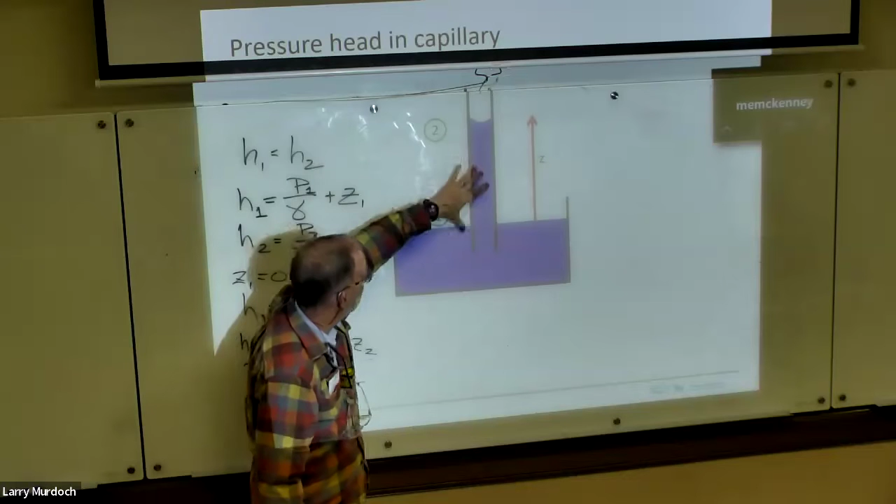So what that means is that the pressure head is equal to minus Z2. So what we saw in the last slide is that pressure head is going to be negative, and what we see here is that if it's in equilibrium, with no flow, the pressure head is going to be equal to the negative of the height above the water table. So this wicks up by 10 centimeters, and the pressure head here is minus 10 centimeters.

Okay, so that works out just using the principles that we've seen. The question then is, okay, so here's also some terms. So this is the pressure head. This is how we've been using this for a month or so now, right? And some of the terminology would use pressure head.

The people that work in this area, the pressure head is always negative, so they have a term called soil suction and moisture tension, and these things just drop the negative sign. For people working on soils, as the suction gets increasingly positive, the soil is getting drier, and the pressure head is getting increasingly negative. So we just need to be aware of these different terminologies.

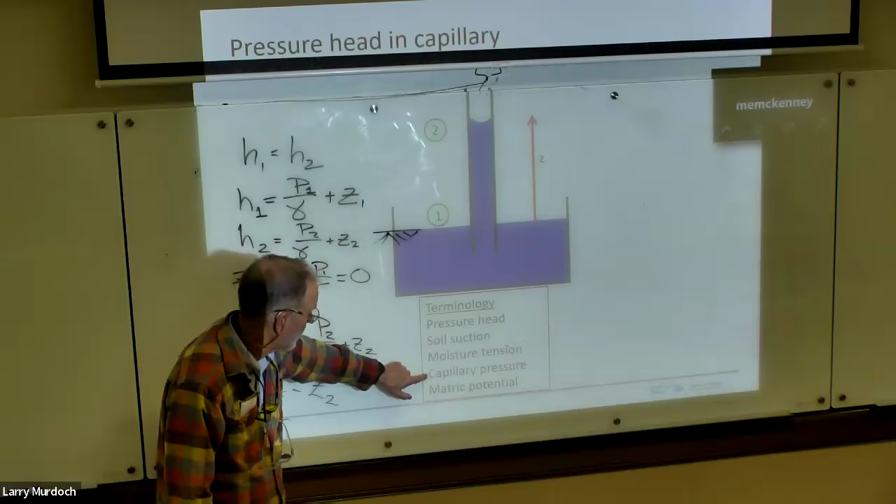The capillary pressure is the difference between the air pressure and the water pressure, and I'll show you how that is. That's also a case where the sign is flipped, and same with the matric potential. So these are all terms for essentially the same thing, except the sign can be different.

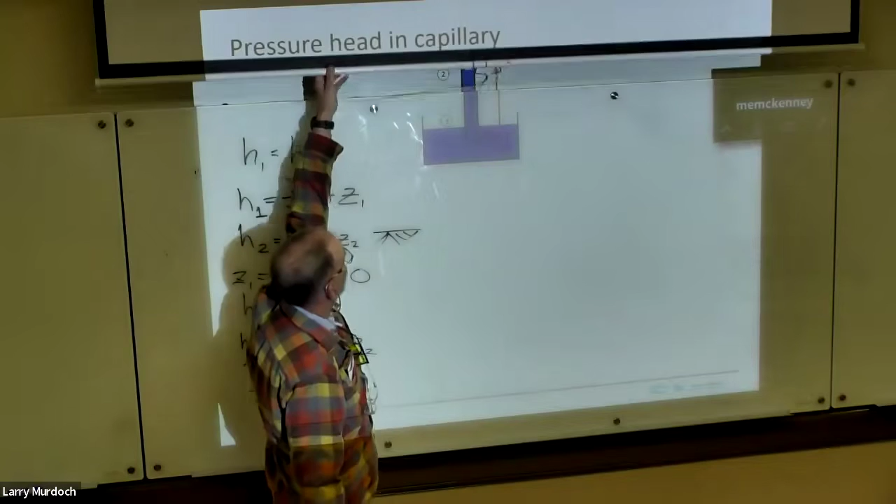Okay, so I want to show you how this ends up happening. It's kind of peculiar that it ends up with this negative pressure. So what we want to do is take a look at how that is working, and I'm going to blow up this region right in here, right around point number two. Okay, so here's the capillary, and it's got a curved meniscus like that, and this is water here, and this is air.

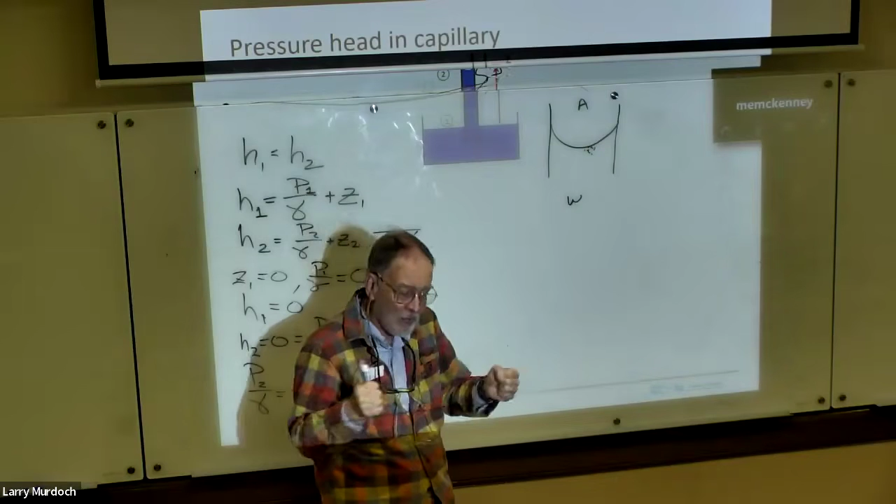So what happens is you look at this interface, there are molecules of water here, and molecules of water are attracted to other molecules of water, and they interact. But right at the surface, there are molecules of water next to one another, and they interact with their neighbors. That one right there interacts with its neighbors, and a molecule back there, but it doesn't have any molecule up here of water to interact with because it's right at the surface. So it's going to behave differently than molecules of water down here that are completely surrounded by other water molecules. Okay, so that gives rise to a surface energy, and the energy will depend on what two fluids we're dealing with.

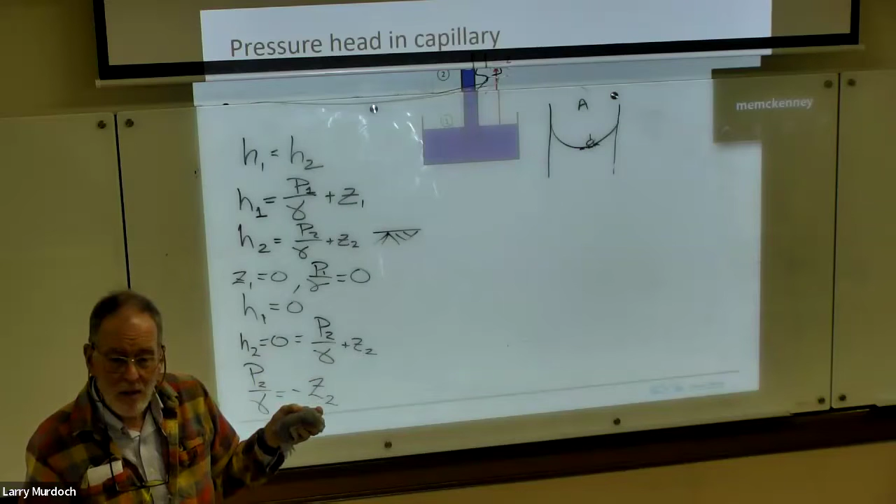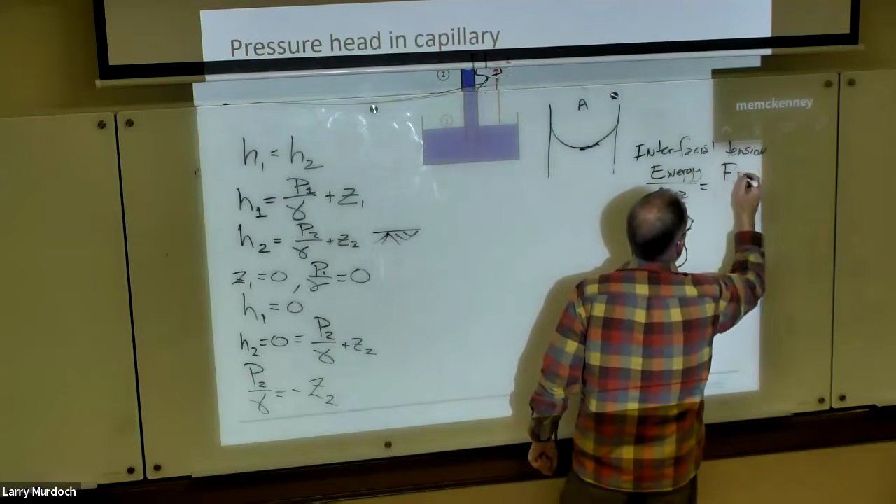So for our applications, we'll have water and air, but it could be two different liquids like water and oil, or water and maybe some other gas. But the two different fluids will determine this interaction. So we have here this interaction described by what's called an interfacial tension, the tension at the interface. And it's the energy per unit area of the interface. Energy, remember, is a force times a length, and the area is a length squared. So for this interfacial tension, we'll use gamma sub i, and that has units of force per length.

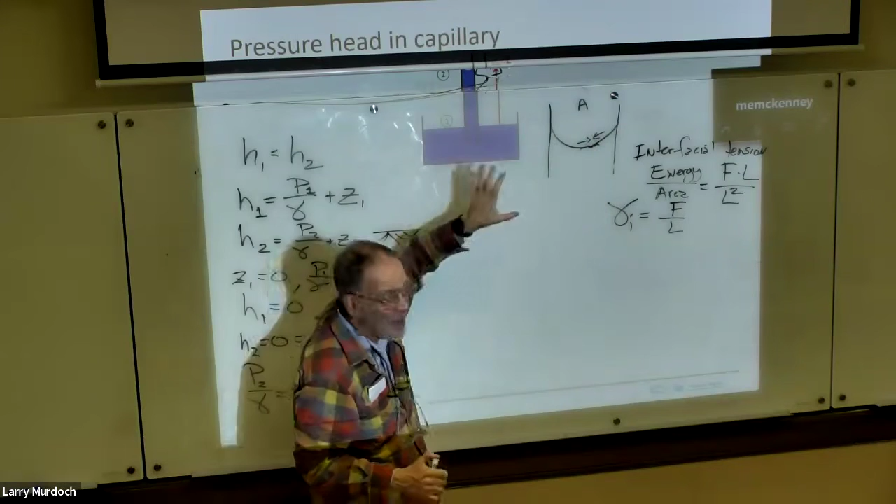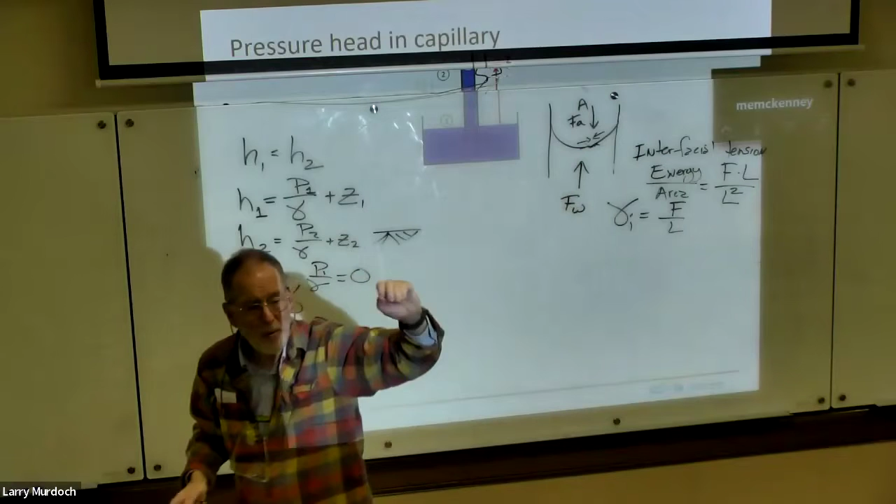Okay, and that we can think of as a tension pulling the surface together because of the imbalance in the interaction between the water molecules across this interface. Okay, so that's going to form a key element to why we have this negative pressure in the vadose zone. And in order to do that, what we're going to have to do is balance the forces across the interface. So we'll have a force here that's in the water, a force here that's from the air pressure, and then a force generated from this meniscus here. Remember, from physics, you can balance forces, and if something's in equilibrium, the forces have to balance. So we'll balance the forces across this interface, and that will give us a way to think about the pressure in the vadose zone.

Okay, and we'll pick that up on Monday.